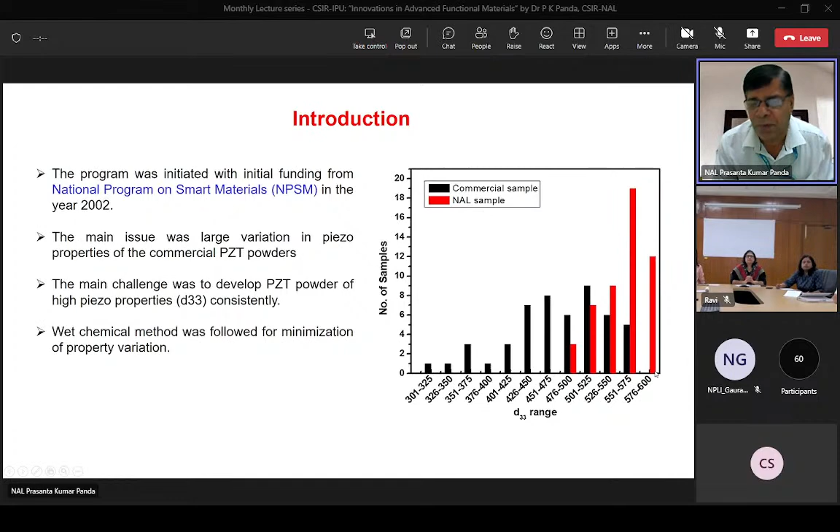As you can see from the graph, back in 2002 commercial samples showed large variation in properties, from 300 to 550 picocoulomb per Newton, while the material we prepared at NAL showed a minimum of 500 picocoulomb, achieved in a narrow band. I'll cover the details in the presentation that follows.

In 2018, this technology was transferred to an industry in Bangalore called MS IPA Private Limited for commercial sale of PZT powders, with different products. So what is this technology all about, and what is its application?

Coming to the company, IPA is indigenously fabricating accelerometers, as you can see here. Inside this, it contains a PZT ring, and this is exactly the shape of the PZT ring. Our contribution is the technology to prepare this PZT ring.

This is just like a heart in a human. It is very crucial because the accelerometer measures vibration and force, and that is directly applied to this PZT, which generates the charges.

The PZT generates charges proportional to the level of vibration, also depending on material properties. After we characterized it, initially we gave samples two or three times, they tested them, and some improvements were required. Then finally it was optimized.

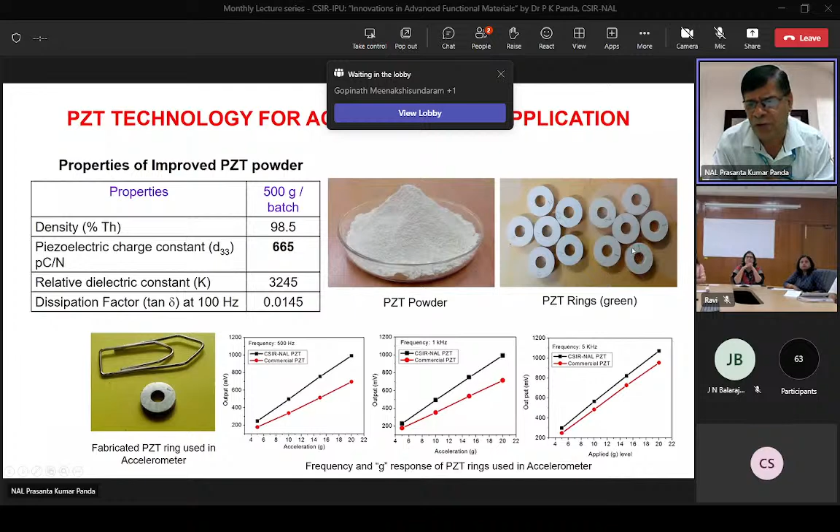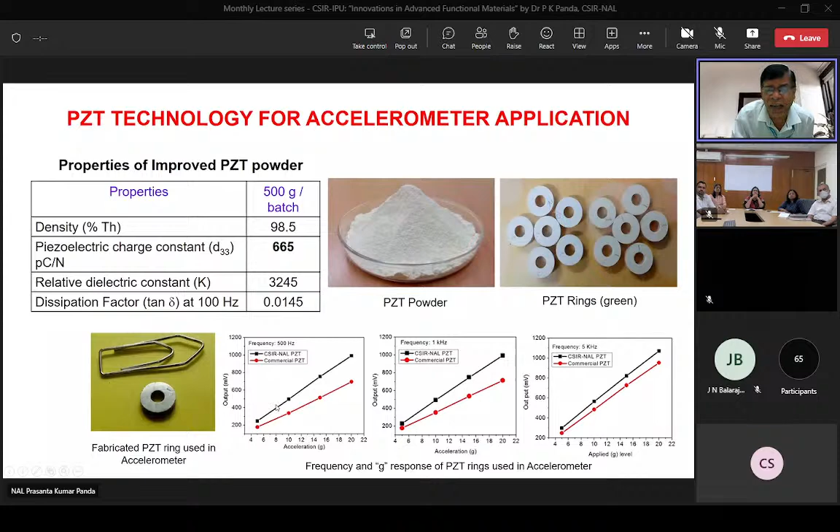This ring is prepared and tested at different frequencies - 500 Hz, 1 kilohertz and 5 kilohertz. In all cases, the NAL-developed PZT produced higher voltage, and the graph is totally linear compared to the commercial grade PZT.

So using this technology, once it was transferred - just before COVID - the company went ahead in establishing the facilities.

As you can see, these are the facilities already available with the company. They have roller mills, a furnace for heat treatment of PZT powders, and a pellet tablet making machine. They make these powders - you can see these are the green parts - and after sintering you get these PZT rings. These rings are also poled in high voltage DC, and finally they fabricate PZT accelerometers, the final product.

So the company is already producing these rings, and interestingly, they have used this technology for their own use, since they require these rings for their final products. In addition, recently they have also supplied some PZT powder to IIT Guwahati.

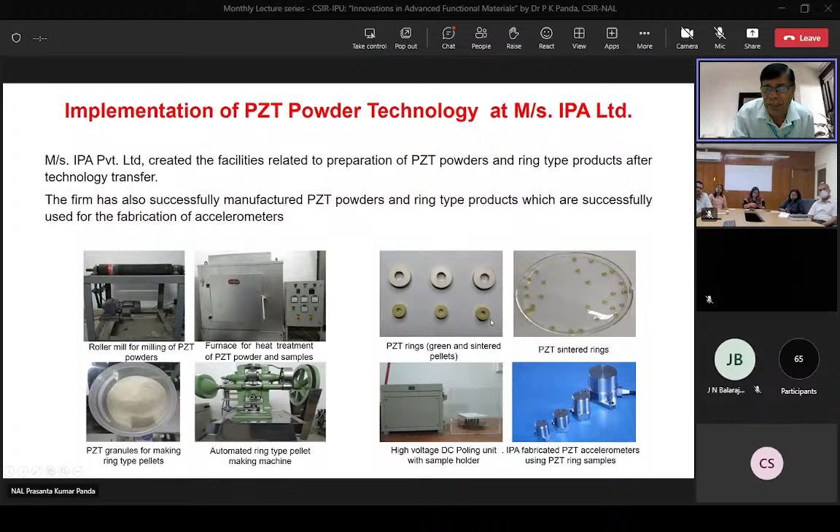So in this area, I thought I will also throw up a few slides on what is the technology and how difficult it was, but with less time, I will go only for the main slides. So maybe just this is the materials field, I will not take much.

Materials are divided into metal, ceramics, polymers and their composites. All modern materials can be put into functional materials, where for any functional properties such as thermal, magnetic or electrical, they must have properties depending on the applications. Similarly, nanomaterials, having less than 100 nanometer size, because of their high surface area to volume ratio and quantum effects, are very promising materials. And smart materials, where PZT comes under smart materials.

What smart materials do is sense and actuate - only those materials are called smart material. For example, PZT can be used as a sensor to measure the vibration of an aircraft or aerostructure. With a control system, it can also be applied as an actuator to reduce the vibration. Therefore, these materials are smart materials because they are able to sense the vibration and also able to reduce it.

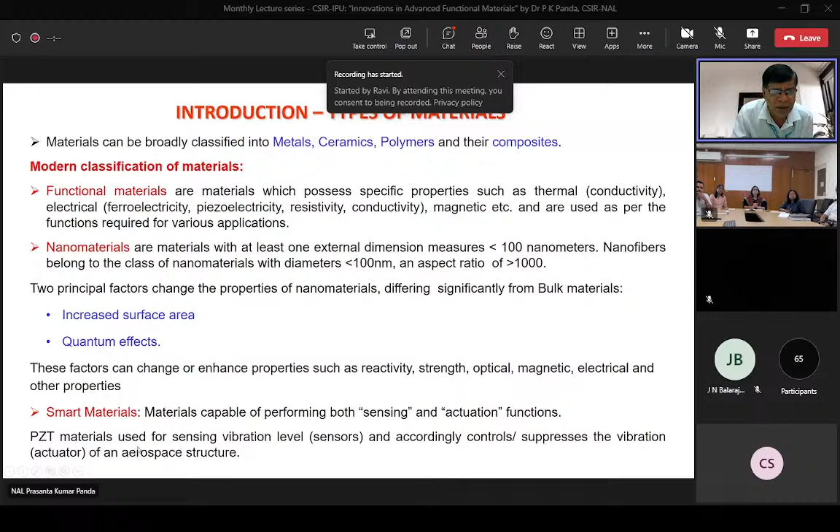So whatever I will be presenting on PZT, that is smart materials, and a little bit on nanomaterials. So broadly, all the materials come under functional materials.

This is typically the piezo word, a Greek word, meaning pressure - pressure electricity. The direct effect is when mechanical stress is converted to electricals - that's called direct effect, and it's in sensor mode. The converse mode is when you apply an electrical field and get mechanical strain and block force, which is used for reducing vibration.

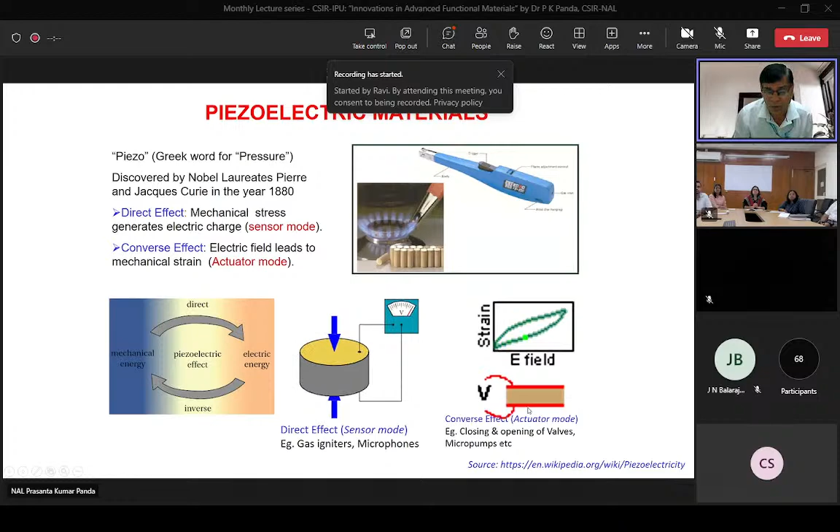Typically in a house we use it to light a gas stove - it contains a PZT material. When you apply a stress, through a finger, it generates some charges and that helps in the lighting. You can see the direct effect in this case: when you apply pressure, a voltage is generated, and similarly when you apply a voltage or electric field, you get actuation, that is motion, and also block force can be generated instead of displacement.

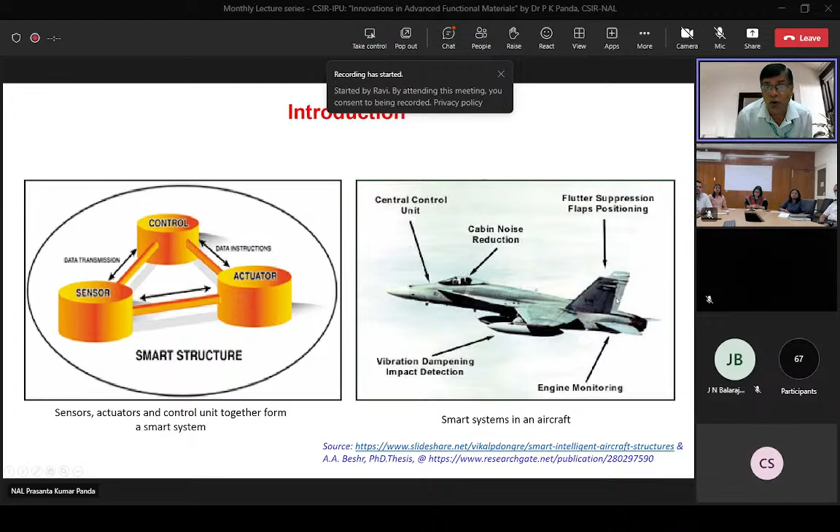This concept is used to make smart structures, aerospace structures, and that's why this is interesting for NAL. PZT can be used as a sensor and actuator with the control system - we can control the vibration in different places of the aircraft, so the vibration level can be minimized.

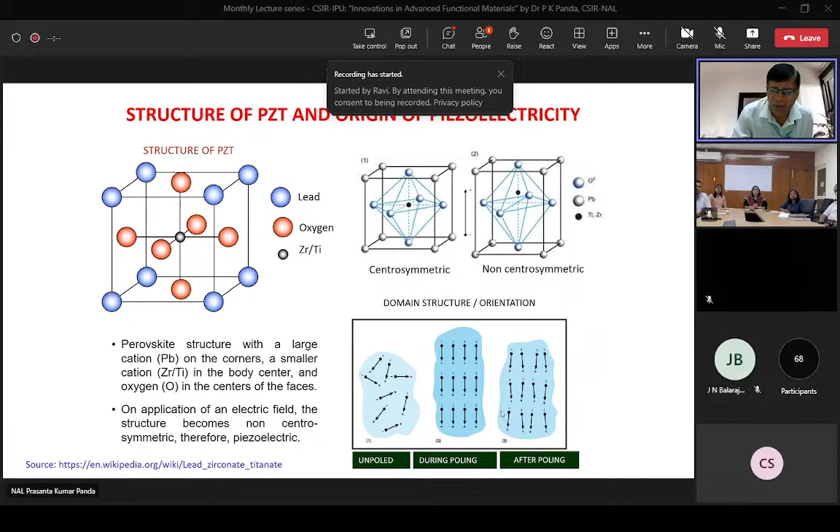Basically, PZT is a perovskite structure of ABO3 structure - lead and oxygen, which are bigger, with lead at the corner and oxygen at face-centered positions. However, zirconium and titanium, which are very small because they are tetravalent cations, are in the center. They can move up or down depending on the electric field you apply, called poling voltage. Normally in an unpoled condition, the electric dipoles are randomly oriented, similar to a magnetic analogy. After poling, they will be aligned in one particular direction, and this remains after poling.

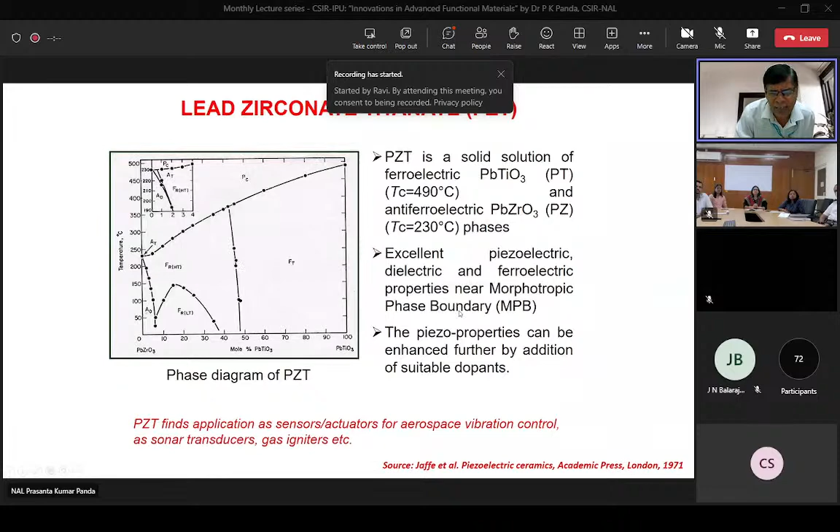If somebody wants to synthesize PZT material, one approach is to go for this phase diagram. What is interesting is it's a solid solution of lead zirconate and lead titanate. At this composition, about 48-52 or 52-48, both tetragonal and rhombohedral phases coexist. Therefore, this is called the morphotropic phase boundary, and one should synthesize in this condition. Further addition of dopants will also enhance the properties.

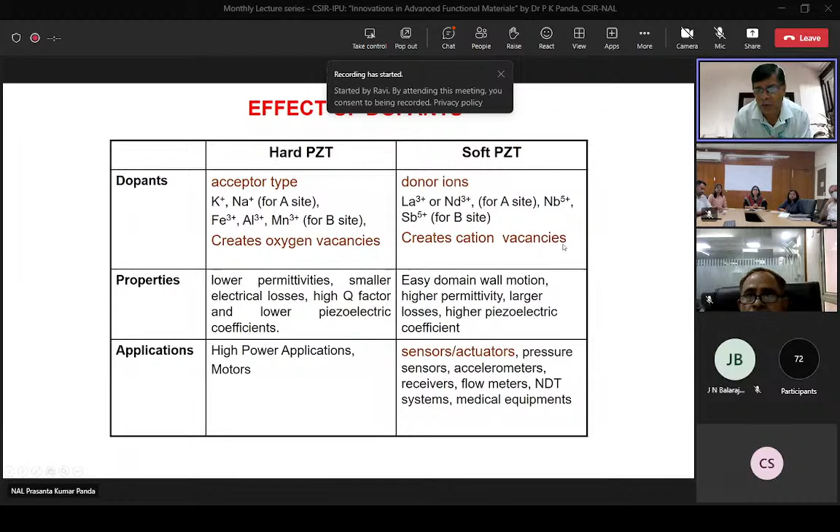In our case, you have to go for soft dopants, wherein in the ABO3 structure, you select a cation of higher valence, one valence higher, so that we create cation vacancies. These cation vacancies help with easy domain wall motion. So this is the science behind a little bit on piezoelectric material.

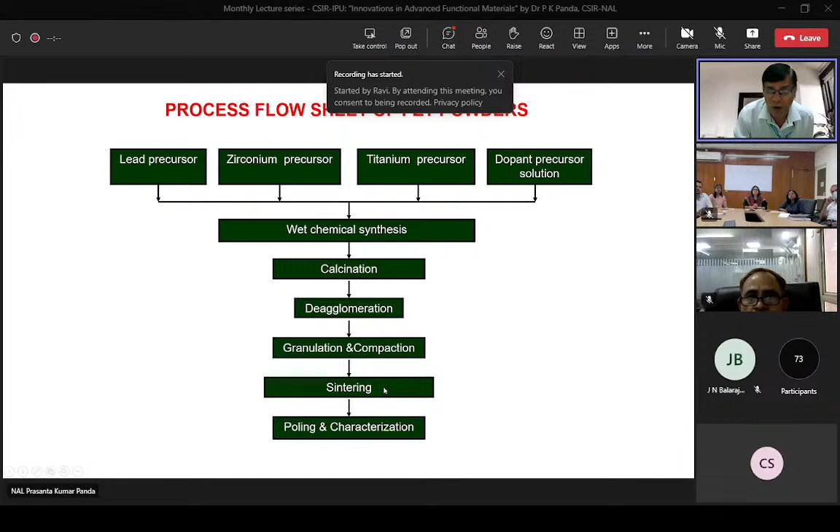When you take various precursors, you have to do it by wet chemical method - this is very important. We should not go for the mixed oxide method; the chemical method will help in homogeneity in mixing when dealing with multiple components, multi-component systems, and their calcination. Some are at 1100 plus, then de-agglomeration after cooling, granulation and compaction to make pellets, and after sintering we have to do polishing, poling, and characterization.

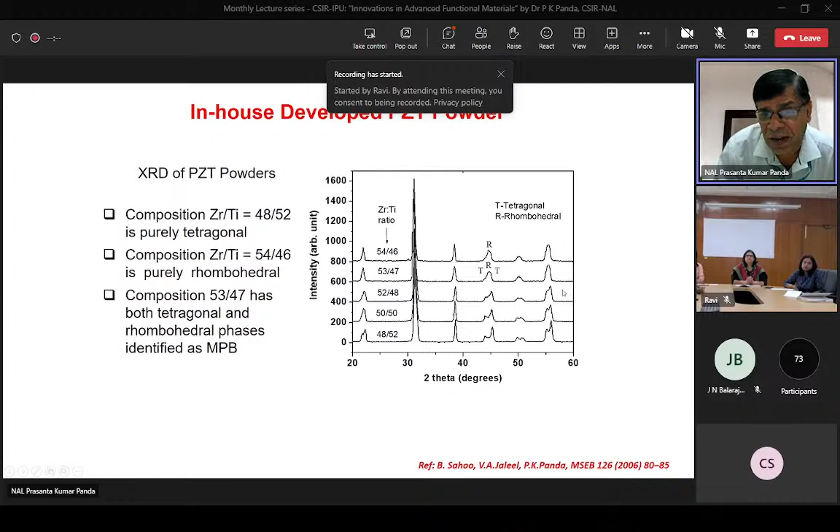This is the method for piezoelectric materials, and one should not forget to try different compositions near the morphotropic phase boundary to find the existence of both tetragonal and rhombohedral phases, to make sure that is the right condition and right kind of material to select to get maximum piezoelectric properties. After that, dopant has to be added appropriately.

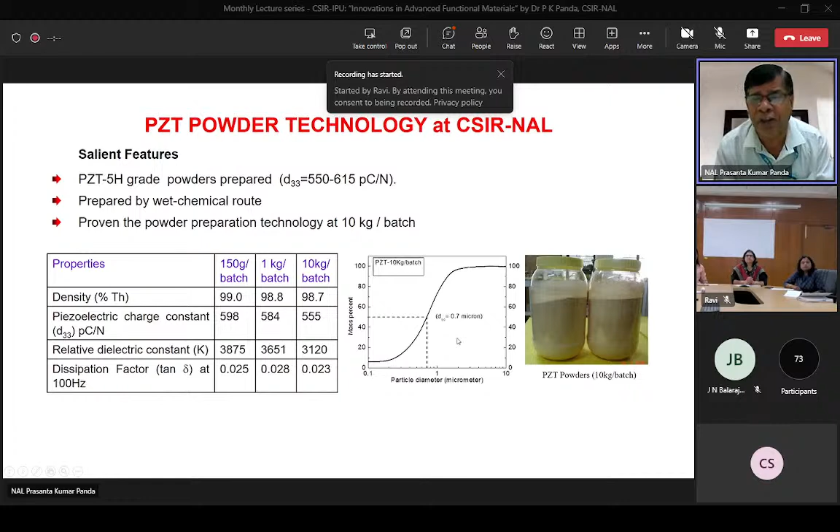In the first project, we developed a large scale 150 gram batch piezoelectric material having about 600 picocoulomb per Newton, which was further upscaled to a 1 kg batch in a CSIR 5-year plan project, and then further to 10 kg per batch. This upscaled material still has high D33 properties, and as you can see, the particle size is less than 1 micron, showing it's a very fine powder with good reactivity when making bulk materials or sintering.

So what is interesting, and what are the innovative steps for enhancement of piezoelectric property? It is very difficult to get high picocoulomb per Newton or high piezo properties. Generally papers deal with studies on dielectric and various other properties, but there are hardly a few papers that suggest how to get high piezo properties. Even if you try them, it's very difficult to get the properties. I don't know, people leave some gaps in those properties, so this has to be learned ourselves.

If you take a random PZT composition, you may end up with just 50 picocoulomb per Newton. But if you follow the morphotropic phase boundary as I've shown, that takes you up to 200 picocoulomb per Newton. Then in MPB, you add some dopants to enhance it further to 350 picocoulomb per Newton. If you optimize the dopant addition, the type of dopant, and overall composition, it may go beyond 550 picocoulomb per Newton, and that has happened in our case.

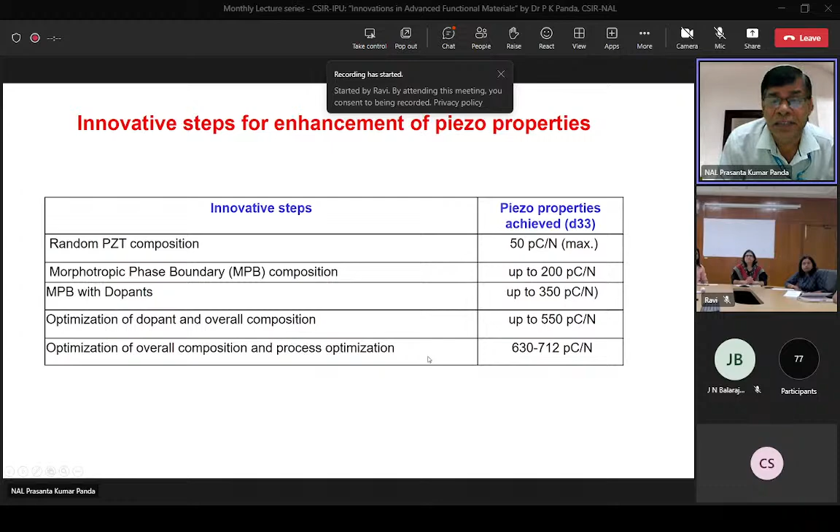So from our experience, I am telling you about different stages of its development. Finally, optimization of overall composition and process optimization led to the maximum value of 712 picocoulomb per Newton, and this is the final composition we are having. This final composition was transferred as technology. So this is about the projects.

What we have done is from NPSM, CSIR 5-year plan project, again second phase of NPSM, again CSIR 5-year plan project, and there was a project from the Electronics and Information Technology Ministry for energy harvesting. So 4 or 5 projects we carried out over more than a decade, and there was a technology transfer, and one PhD student has also gotten a PhD in this area. There are several papers and book chapters as well.

Now coming to the next one, after developing PZT - PZT basically contains lead oxide, which is poisonous. In Europe and USA, lead-bearing compounds are not even allowed nowadays, so therefore scientists have shifted towards lead-free piezo materials and devices. Similarly, in our lab also, we initiated lead-free piezo materials after this PhD.

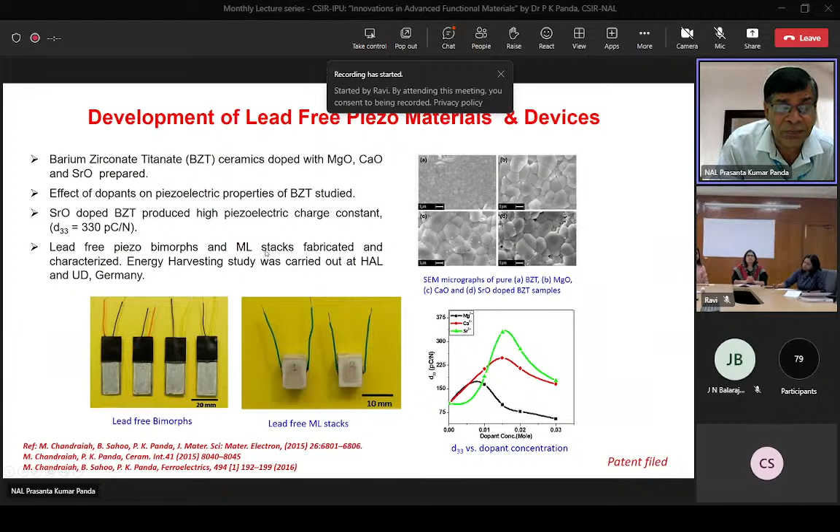A student joined for the PhD program and carried out initial experiments. We selected BZT, barium zirconate titanate, due to certain advantages given the shortage of time - I won't get into details - with certain dopants, and initially got a D33 of about 330 picocoulomb per Newton. There are some composition studies, and I'm just giving one slide out of his PhD thesis. There are several publications and a patent was also filed in this area. Afterwards, recently we enhanced the property further up to 510 picocoulomb per Newton.

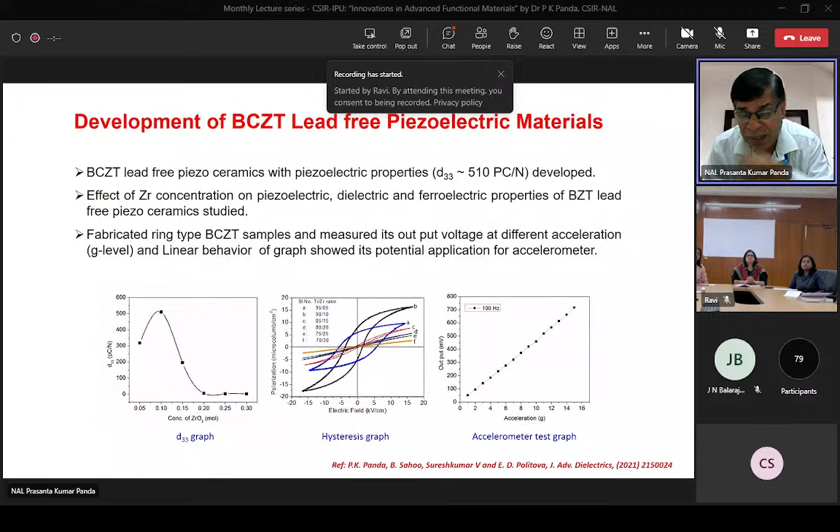This is very similar to PZT, which we developed initially years ago. Here we further fine-tuned the heat treatment process and dopants, and as you can see, the zirconium-titanium ratio was also changed, resulting in different hysteresis, which has also been published recently. What is interesting is this was also tested for an accelerometer, showing the same linear behavior similar to PZT. That means lead-free piezo has now also been developed as a technology usable for accelerometer applications. In fact, this is now included in the Mission Mode project currently going on along with BITS Pilani, which will focus on LTCC-based accelerometer development.

There was a project also sanctioned in this lead-free piezo materials from Naval Research Board during 2015 to 18. We have filed a patent, and also two students worked on it. One student already received his PhD degree, and the other, Mr. Tejas, is now continuing under ACSIR, maybe completing at the end of this year.

There are several publications. Fortunately, we contributed one review article at the beginning, when PZT was getting over, at the beginning years of lead-free piezo materials. That's why it was very popular, and it has got a citation count of 970 so far in the last 14-15 years. There are also book chapters and other publications.

We also had Indo-Russia collaboration and Indo-CSIR BMBF, which is an Indo-German project that was also completed in this area. Then coming to fabrication of multi-layer stacks.

What I have explained so far is the development of basic powders, PZT and PMN. But then we have to make them into devices in the form of multi-layer stacks. This was, in the initial years, prepared by the cut and bond method, a crude way.

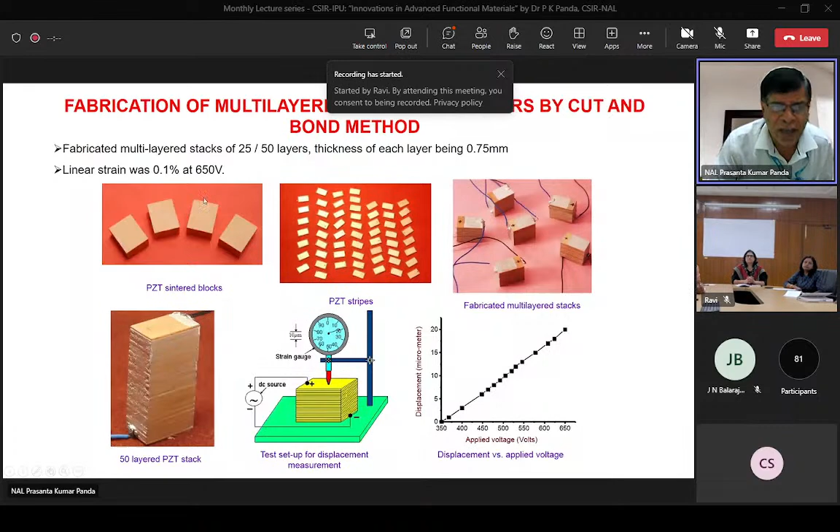When this was developed, there was brainstorming discussion that we have to further reduce it, because this was requiring 650 volts. Then we calculated that we have to bring each layer down to 100 micron thickness. So we had to get a tape casting unit, screen printer, and other precision units. It was purchased from Slovenia under a 5-year plan project.

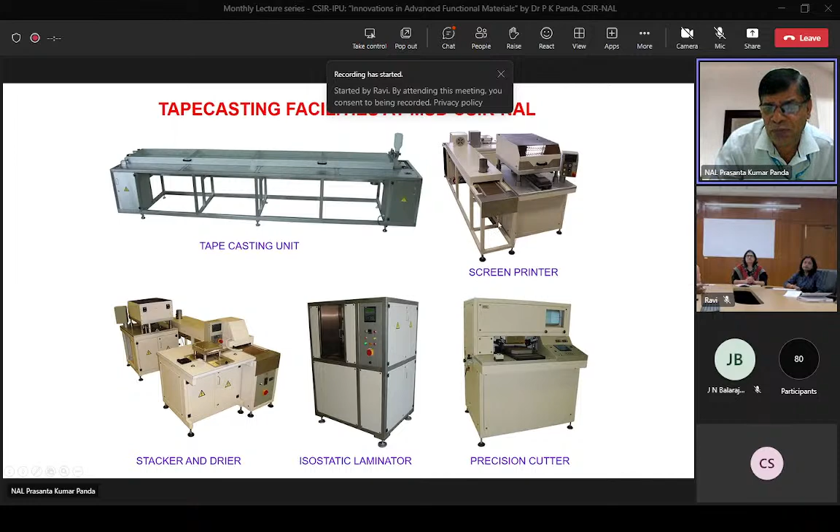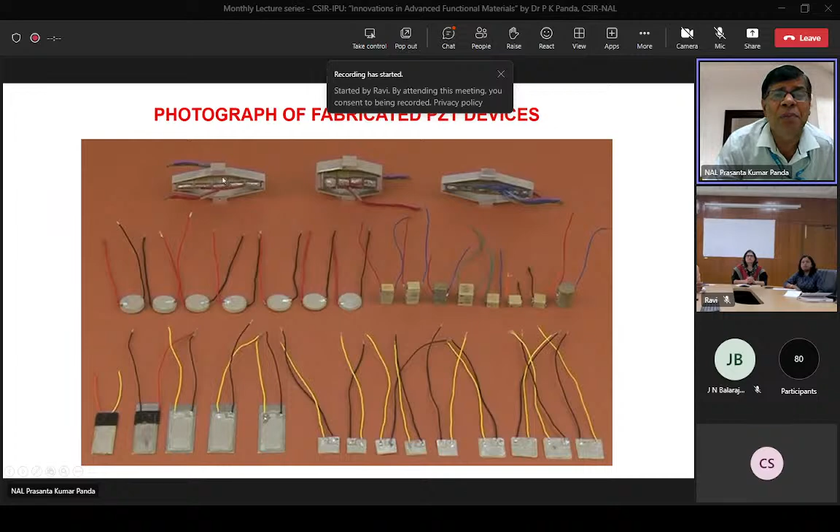As you can see, this is a photograph of a typical PZT tape. Using that, we have developed amplified actuators and various other multi-layered stacks. Typically, what you can see here, there are 120 layers, each layer is 100 micron, and weight is 9.4 gram, and area is 12 mm by 11 mm, which is 132 mm square. It gives a block force of 5,200 Newton.

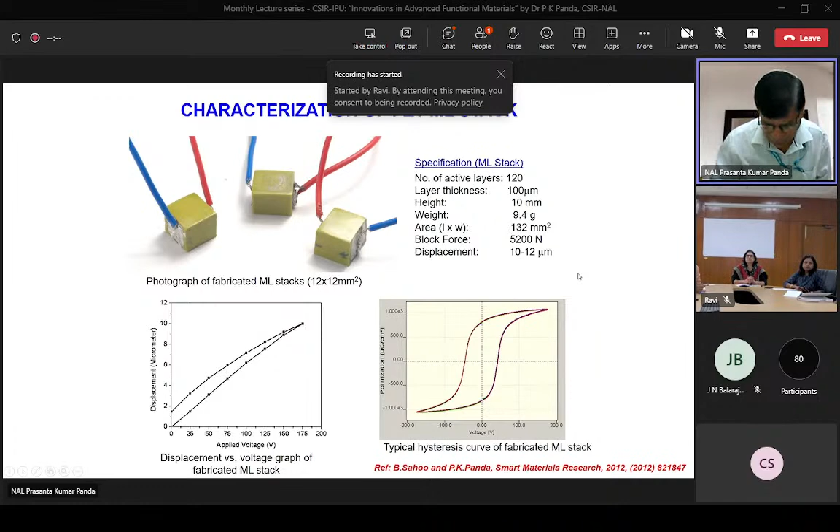There are also some projects on energy harvesting, and I'm not going into the slides on energy harvesting. That is about the smart materials.

I'll come now to the nanomaterials very quickly. This work involved the preparation of polymer and ceramic nanofibers by the electrospinning technique. Fortunately, in 2005 and 2006, I had been to NUS Singapore under the CSIR Raman Research Fellowship Scheme. As you can see, to define the nanofiber, the L/D ratio, that is length to diameter ratio, has to be more than 1000, and its characteristic diameter should be less than 100 nanometers.

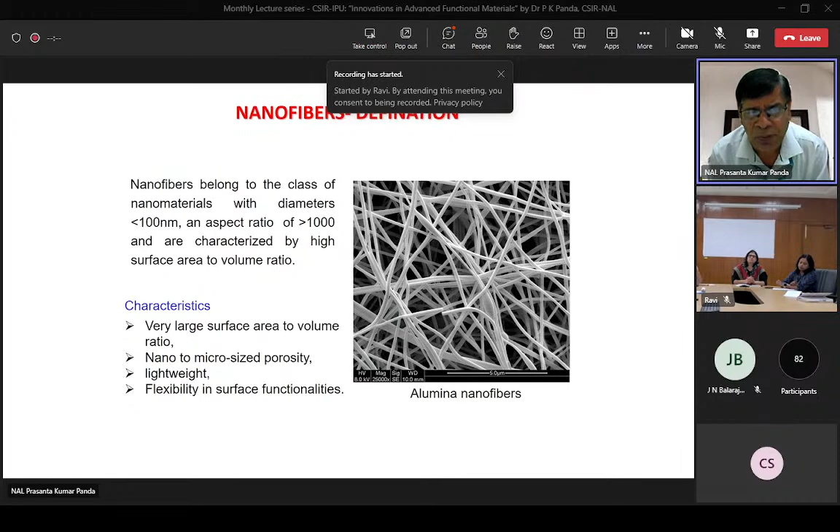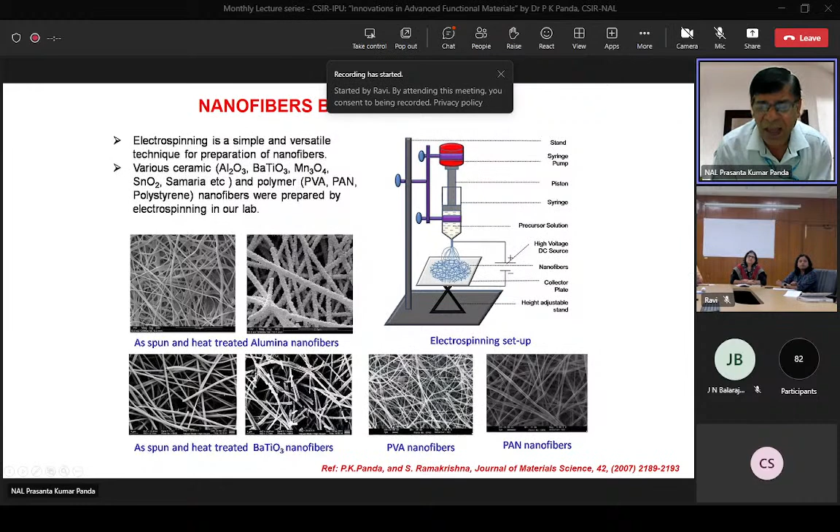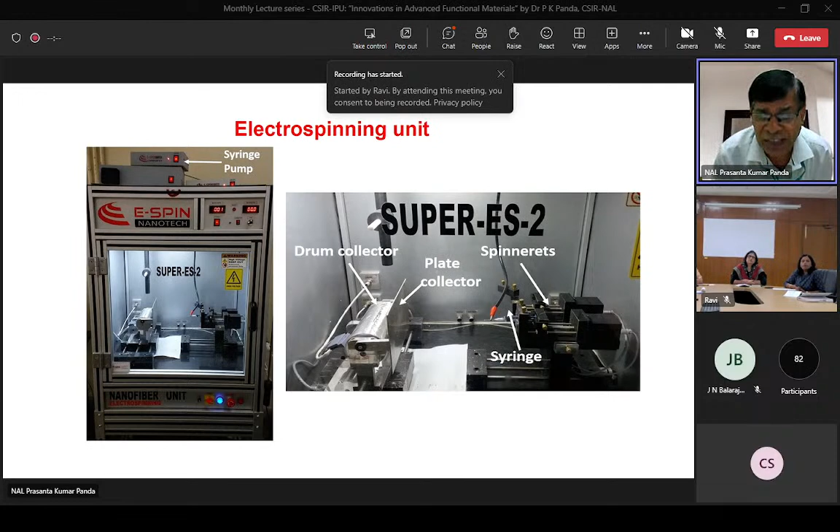By using this facility, we initially prepared, this is the first publication with Professor Ramakrishna from NUS, alumina nanofibers. Then after coming here, we got this electrospinning facility, and we have a multiple electrospinning unit to prepare membranes for various applications. What is interesting here is that because of the nanofibrous nature, it has a high surface area to volume ratio, very good for various sensor applications.

Our initial years were actually to prepare not only polymer nanofibers, but also ceramic nanofibers, even piezoelectric ceramic nanofibers. So we successfully prepared barium titanate nanofibers by electrospinning, as published in Ceramics International. I won't get into details, but you take the precursors of barium titanate, use PVP as the polymer vehicle, and do electrospinning to generate the fibers. After heat treatment, you get the nanofibers of barium titanate.

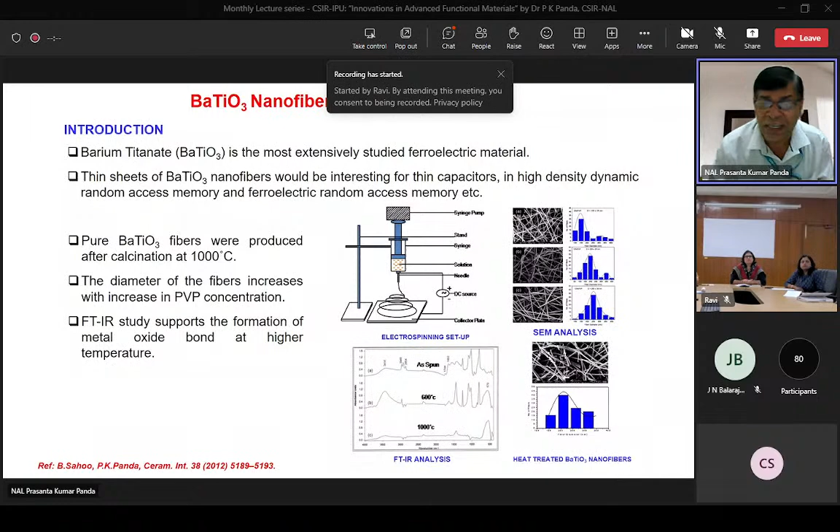This will help in making very thin sheets of dielectric materials, which we need when looking for miniaturization of various components. It is not possible to make a bulk sample and then cut these brittle ceramic materials into very thin slices of a few microns. The best approach is electrospinning to make very thin sheets.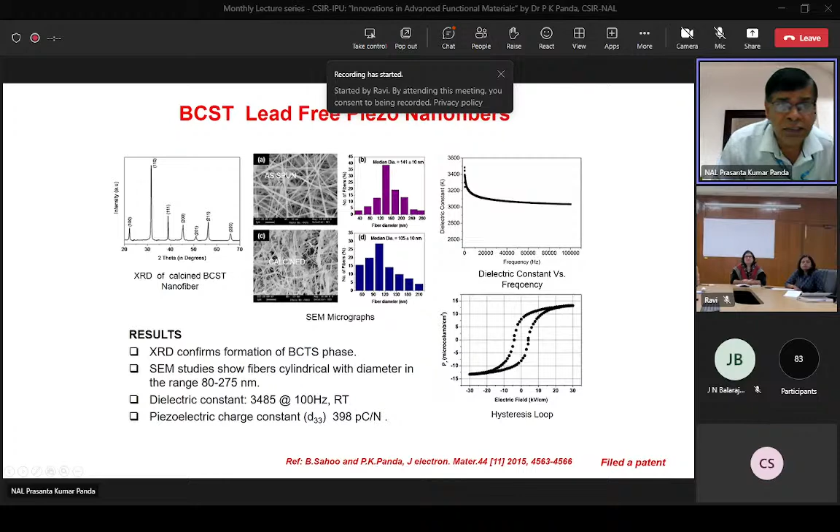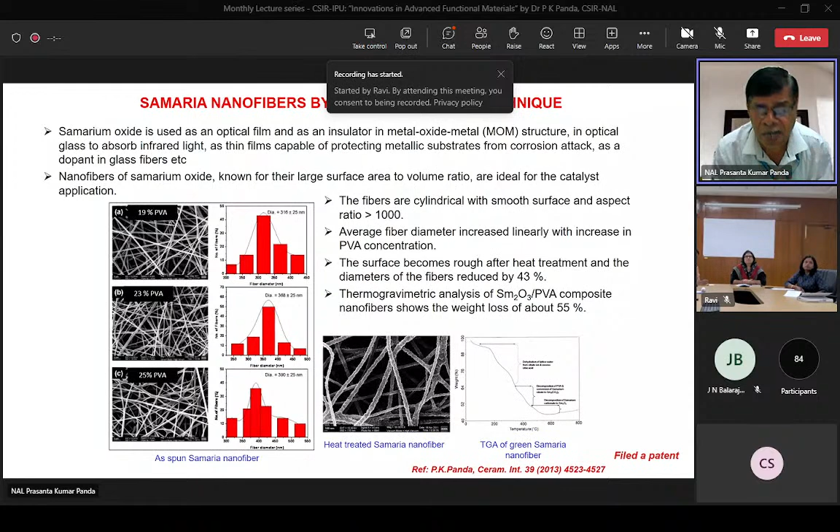Similarly, Samaria nanofiber was prepared by electrospinning technique, and this was also filed as a patent. The publication is now in Ceramics International, with similar procedure. You only change the various polymer precursors and processing conditions, and accordingly change various concentrations. Their diameter was measured, and their diameter after calcination was also measured. All those details are available in the published literature.

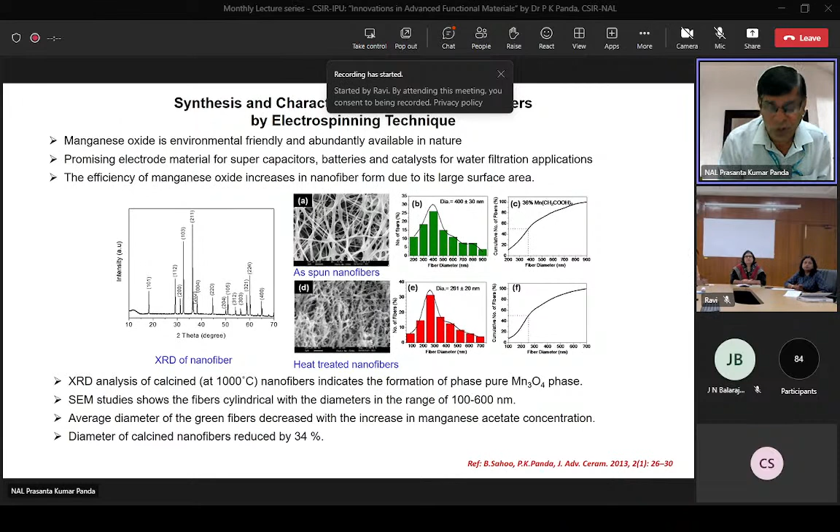Similarly, manganese tetroxide was also published using electrospinning technique, and this is now found in the publication.

When the pandemic came, we thought of using this electrospinning technique to prepare PAN nanofibers, mainly for filtration of materials. In fact, we had tried earlier with water technology, as a DST project was sanctioned to make this PAN nanofibers. This PAN nanofiber of 100 micron thickness was tested for microbiological reduction at Eureka Forbes R&D Center, Bangalore.

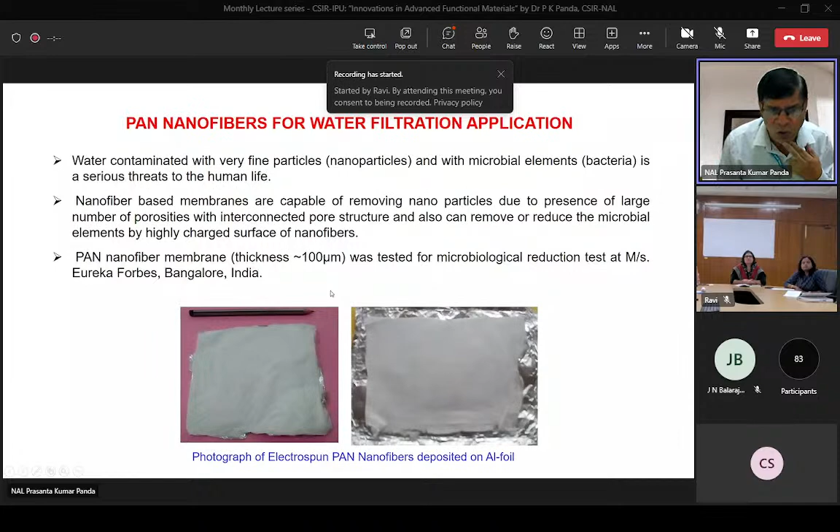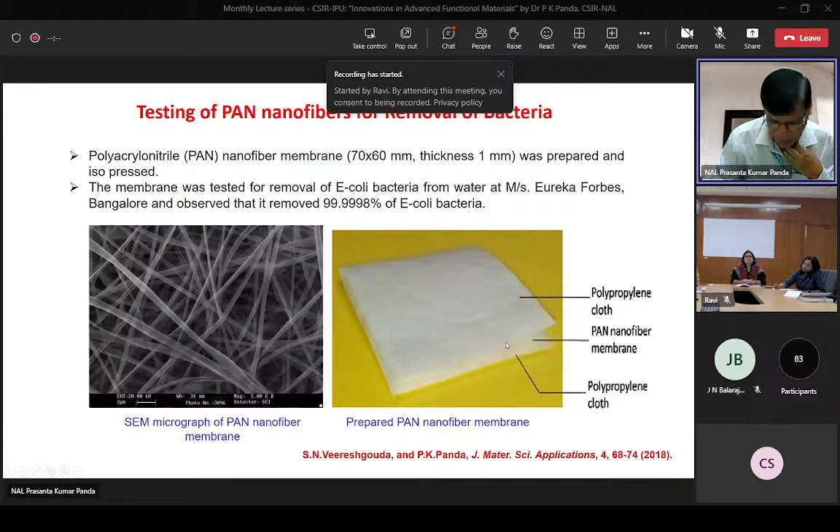It completely removes E. coli bacteria, at the tune of 99.9998% reduction of E. coli bacteria. This was also published. The same thing was extended to make a face mask.

This is also tested in SITRA, Coimbatore, showing more than 99.9% reduction of aerosols, suitable for N95 grade face mask. There are also other tests on blood and other things. A project proposal was also submitted to DST under Indo-Portugal, and the project has been sanctioned to take this work forward.

We got this project from DST from 2015 to 2018 under the Water Technology Initiative, WTI, for development of nanofiber membranes for reduction of microbial emissions for purification of water. In this case, 2 patents were filed, basically on piezoelectric and ceramic oxide nanofibrous materials.

One PhD student completed in 2022, working on preparation and characterization of polymer nanofiber membranes by electrospinning for filtration application, covering both water and air filtration. Recently, last month, another student also completed work on electrospun polymer nanofiber for various applications, varying surface wettability, with a lot of applications including biotechnology.

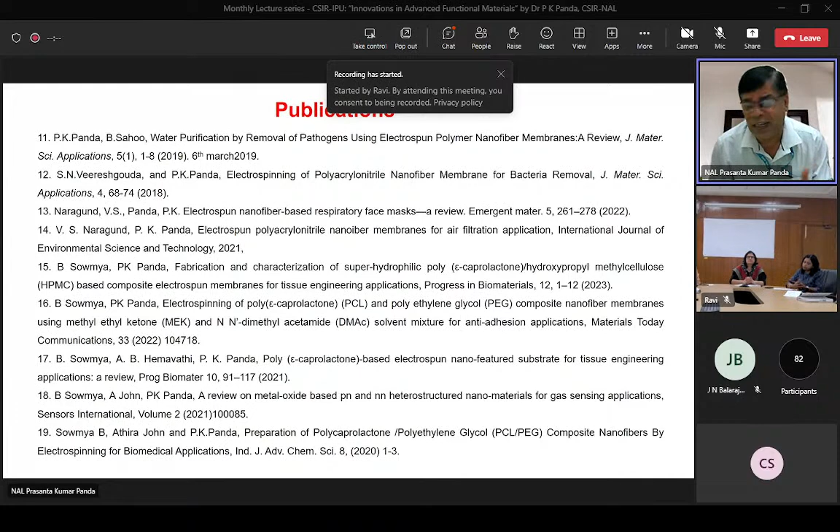There are a lot of publications in this electrospinning area, which we continued with 2 PhD students and a few MTech students, and we are continuously working on this.

Now coming to synthesis of high purity ceramic oxide, this work was carried out before 2000, at the beginning of my years in NAL. So one such project was there.

I interacted with NALCO, National Aluminium Company in Bhubaneswar, and they said ATH is a promising material. They gave us a sample, and we thought ATH is very easy to prepare. But what was required is when you precipitate the ATH, you get the aluminum trihydrate from aluminum salts, such as chloride, reacted with ammonia.

What was required was that it be bright white with low apparent density, 0.24 to 0.5 gram per cc, and most importantly, it should be of insoluble grade, so that it can be used as a fire retardant material and as a filler in paper, plastic, rubber, and also antacids, among various applications.

Finally, a patent was filed and the technology was transferred to a company, Mysuru Minerals Private Limited, for commercialization. The product is bright white ATH via self-seeding. There is innovation in this because it was done by a process of self-seeding, and the byproduct is hydrogen gas.

Now I am realizing hydrogen is very important in recent years. So this process is not only fantastic for generating ATH, but also for generating hydrogen gas.

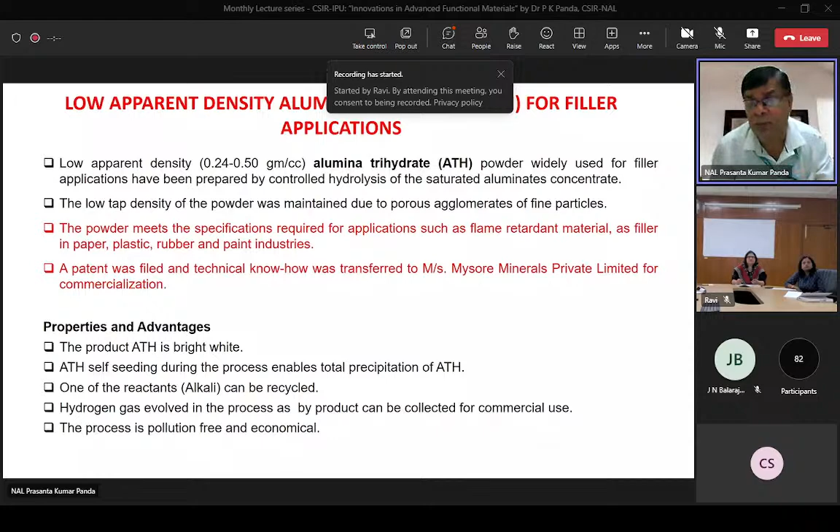It's a reaction of alkali with metals which generates a pure form of ATH. This was a very cyclic process, and it's quite interesting - it looks very simple once explained, but there is a highly tricky thing involved. We have done it and transferred the technology. This technology transfer was even covered in the CSIR magazine, that a low density aluminum trihydrate was developed at that time.

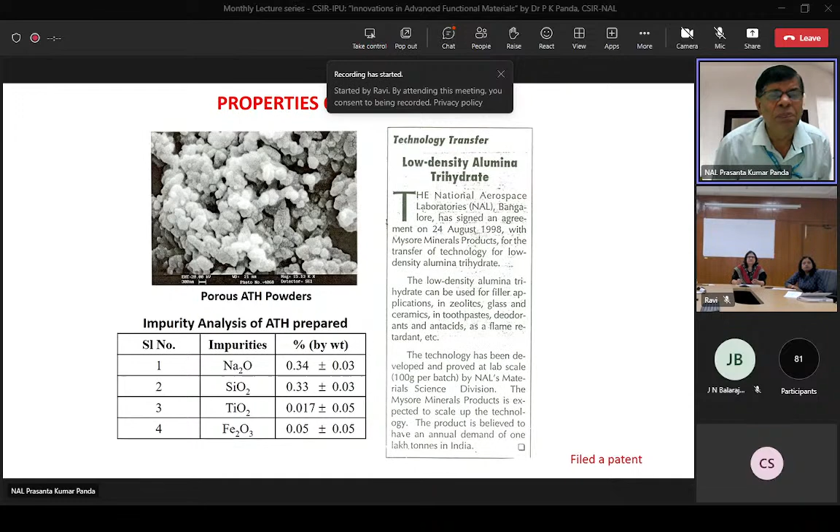This is one more interesting area - we have a hydrothermal reactor in NAL, which is fabricated in-house by our engineering services section.

The good thing here is that, unlike commercially available systems, you don't have to apply pressure from outside - the pressure is autogenous. That means when you have a fluid or water inside a closed chamber, after we put the liquid and reactant, say metals or some other salts, we cover it with a gasket, close it, and heat it. The water is finally heated to high temperature and it generates high pressure. So the pressure is autogenous, no external pressure is applied, so there is no extra cost.

It's only moderate pressure, just like a pressure cooker used for quick preparation of food. Similarly in this case, what works fantastically is that alpha alumina, which is widely used among all ceramic industries - in all ceramics, alpha alumina may be used in about 30-40%.

But even to prepare the high purity form, which Alcoa produces, they go by a process called Sol-Gel process. You precipitate aluminum hydrate, and then you have to heat it at a high temperature, to the tune of 1400 to 1600, 1700 degrees, finally to get alpha alumina. In the process, it will also be transforming into theta, eta, zeta, gamma - like a number of transition aluminas. So finally you may not get a highly pure form of alpha.

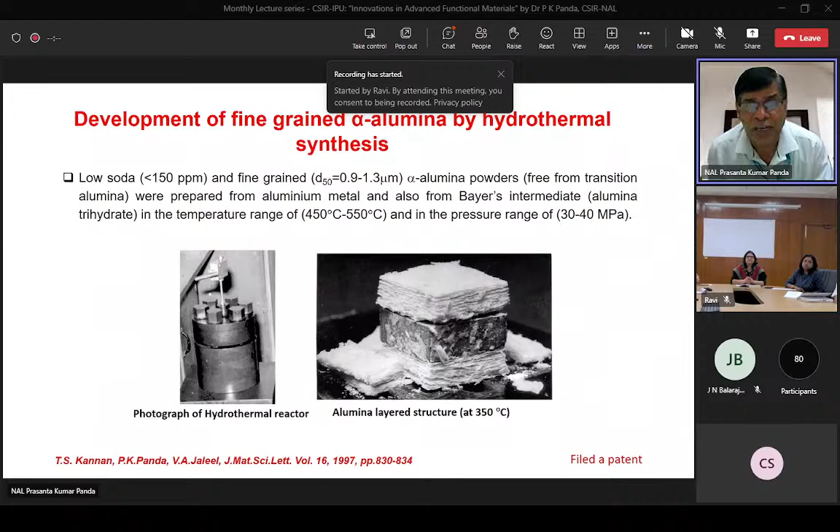Therefore it was very interesting, and we filed 2-3 patents in this area, and this was also communicated. What is interesting here is that initially it reacts with the metal and forms boehmite, and that boehmite has a water molecule, and it releases that directly without going through transition alumina - it forms alpha alumina straightaway.

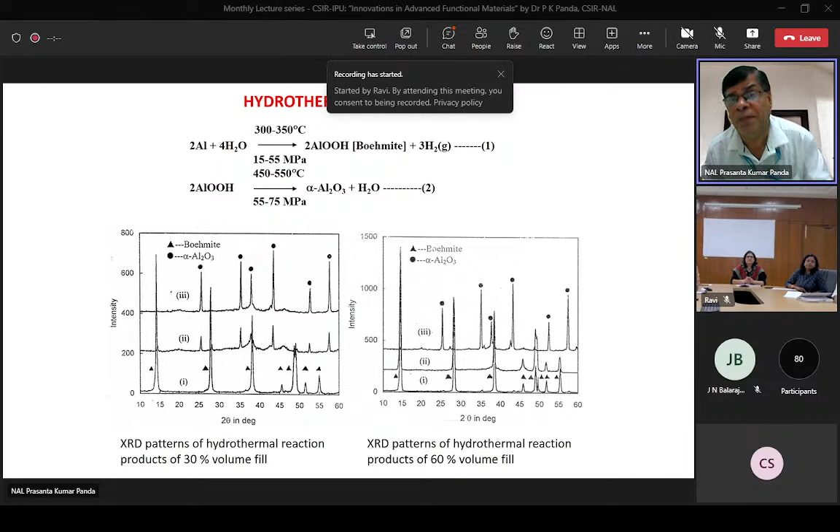Later on this was changed. I collected some sample from NALCO and we tried their alumina trihydrate, which is prepared out of bauxite, to make it much cheaper, and that also worked. After that we communicated to NALCO, and at that time the DGM expressed - he mentioned, 'I am very happy to note that you have succeeded in converting hydrate into alpha alumina at 450 to 550 degrees centigrade, which is something very unique.'

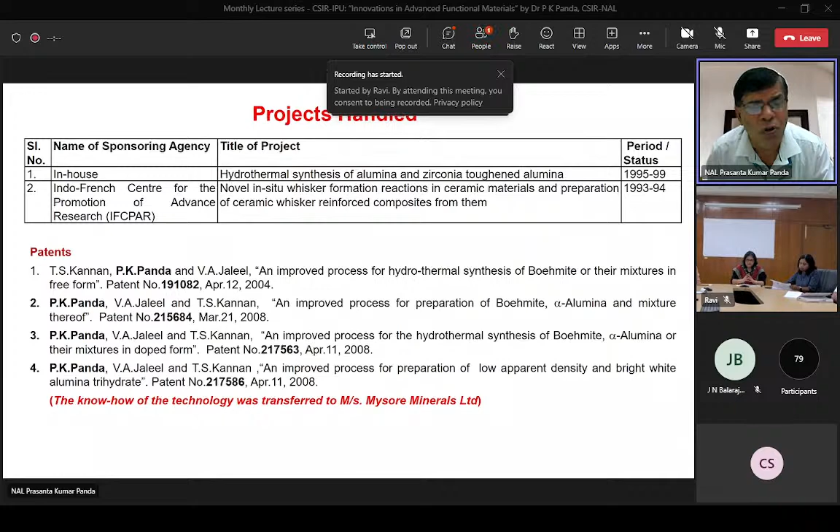But however, after that, the person I think got transferred, and then we were not able to have continuity for the technology transfer. But this technology I still feel is very interesting. The only thing is there is an initial investment cost, maybe on the hydrothermal reactor, but that is also done in a number of ways recently using various methods. So at that time, 2-3 patents we generated in this area, and the know-how technology has been transferred for the ATH.

So these are the publications generated out of it. From my experience, I can say that development of materials provides opportunity for innovation, because material science is very interesting. Anything you try with a little bit of input, you will find something new comes out. It is highly interesting, so it is always innovative - one can be really very innovative in this area. Material science provides that opportunity, and all high performance applications require stringent materials day by day, which is possible through innovation. These are just a few innovations or innovative ideas I have given as examples.

Even currently, we are also using some of these processes to get into hydrogen technology, into hydrogen valley. I will not go into details of that, as that is still something we have got, and that is under patenting.

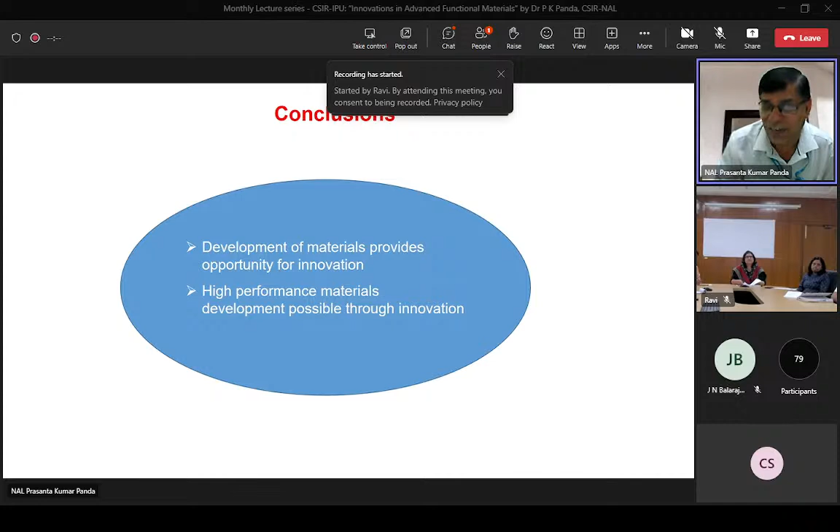With this, I come to the conclusion with acknowledgements to my colleagues working in my team, not as a division as a whole. There are students, about 5 students - 4 have got their PhD, and 7-8 students have prepared their MTech thesis. I'd like to thank Director NAL and the last 3-4 directors through which I have been able to carry out this work, including the current director who nominated my name to make this presentation.

Various funding agencies - NPSM, NPMASS, DRDO, MeitY, DST, Naval Research Board, ARDB - all these programs actually helped us generate the funds to carry out this work. Also CSIR 5-year plan programs, 2-3 programs, and CSIR-IPU for arranging and coordinating this program to make this presentation. Thank you very much.